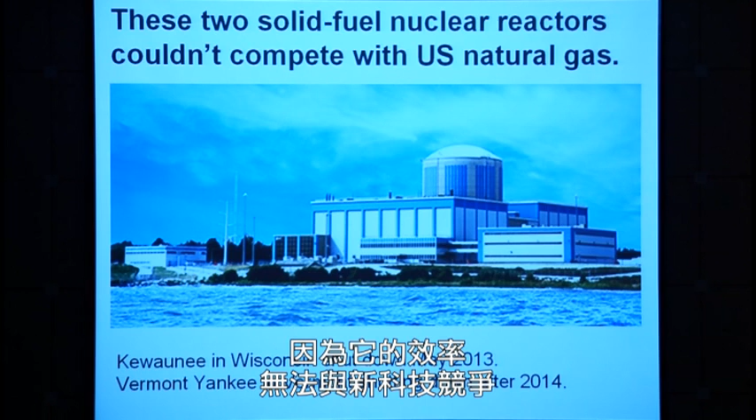The last one near where I live couldn't compete.

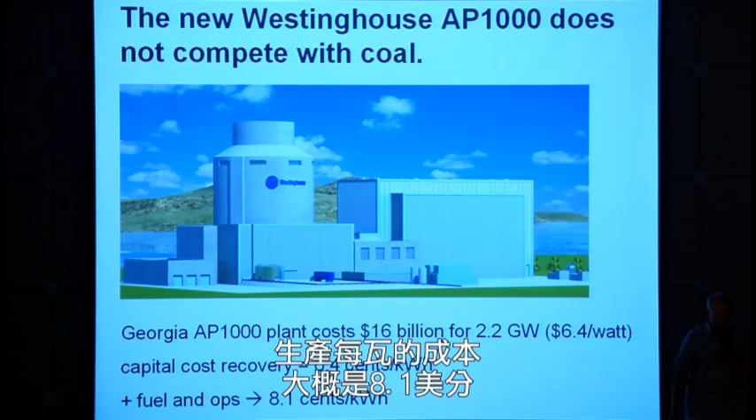There is a new Westinghouse model, an AP1000. Four are being built in the US, four are being built in China right now, and some in other places. If I go through the normal math about how much this is going to cost, I come up with about 8 cents a kilowatt hour for electricity from this new-fangled power plant. That's not going to be quite good enough. It's not cheaper than coal, and it's not cheaper than natural gas. So we can't expect the world to give up coal for these kinds of reactors.

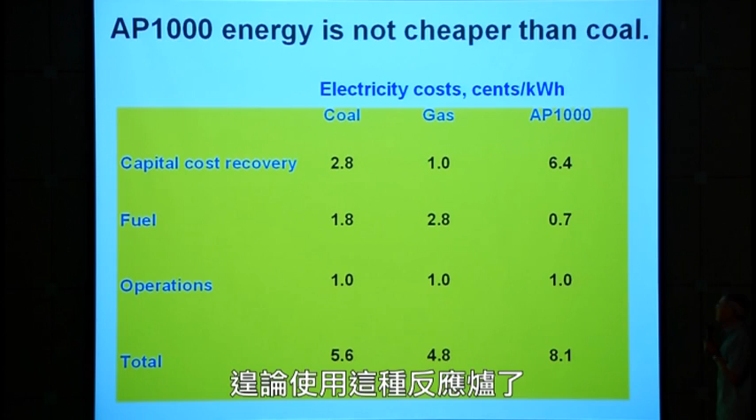So we need a new approach. In the space program, we rejuvenated that program by going to privatization. The company SpaceX looked at the situation with NASA and said that the space shuttle was a complex instrument using 1970s technology that had not been upgraded. So Elon Musk, that entrepreneur, said, okay, let's form a company, let's be innovative. They designed an entirely new rocket engine.

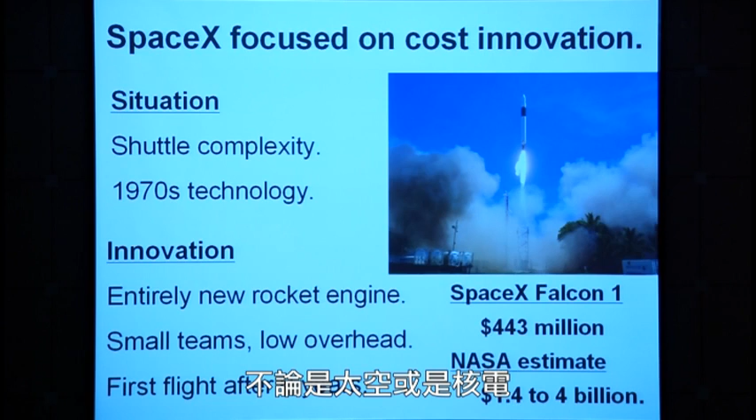They put together small teams with low overheads to fabricate and design new kinds of rockets. Six years after founding the company, they had their first flight. Their first success was this product for $400 million, successful, where NASA had estimated as much as 10 times that cost. So there is an opportunity for cost innovation in space and in nuclear power.

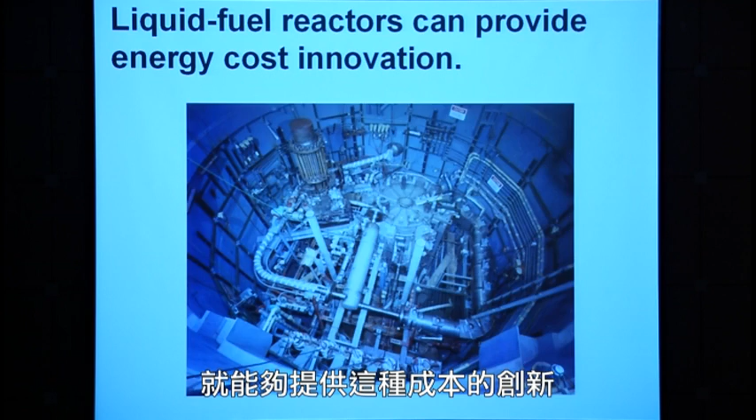And I say that the liquid fuel form of a nuclear power plant can provide that kind of cost innovation, as was done at Oak Ridge.

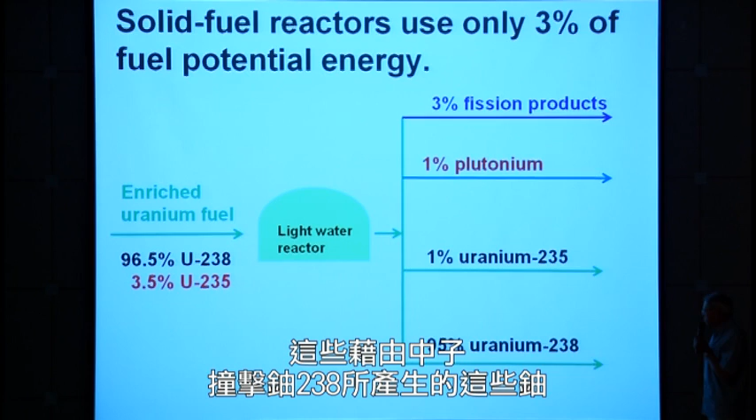has been being burned up inside today's nuclear power plants too. It's a perfectly good fuel, and about 1/3 of the power of the power plant comes from the plutonium that was created by bombarding the uranium-238 with neutrons.

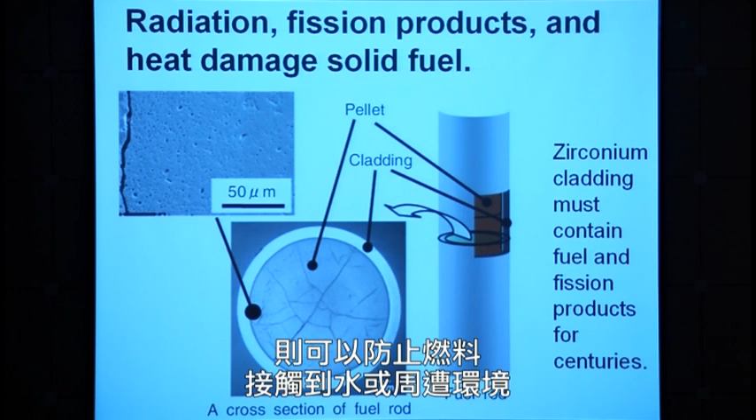But meanwhile, in the solid fuel plant, all that's happening inside this sort of ceramic uranium oxide pellet that is stuffed into a zirconium fuel rod that protects the fuel from the water surrounding the fuel rods. We have to take those fuel rods out before we get well into consumption of the potential energy there, because we're afraid they might crack.

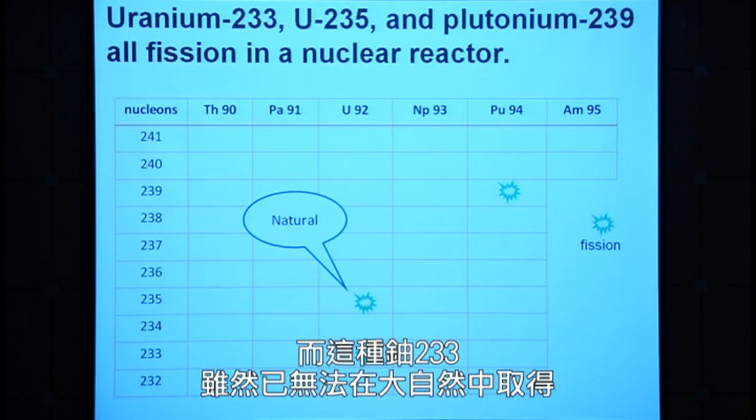There's three kinds of fissionable power sources you can use in a nuclear power plant: the plutonium we spoke of, the uranium-235, and also an isotope that's not naturally available anymore, uranium-233, that we can actually create.

Here's the example of creation of plutonium in a power plant. Neutron absorption, in this example here, where the rows represent the atomic weight of the atom and the columns represent the number of protons in it. That neutron absorption creates a kind of uranium that's not stable and decays in a few days to plutonium, which is a fissile material that's burned in the power generation.

Same thing with thorium. Thorium absorbs a neutron, decays in a few days to uranium-233, which is a useful fissionable power source. So that's the idea of a thorium reactor - it literally creates its uranium on the fly from the thorium.

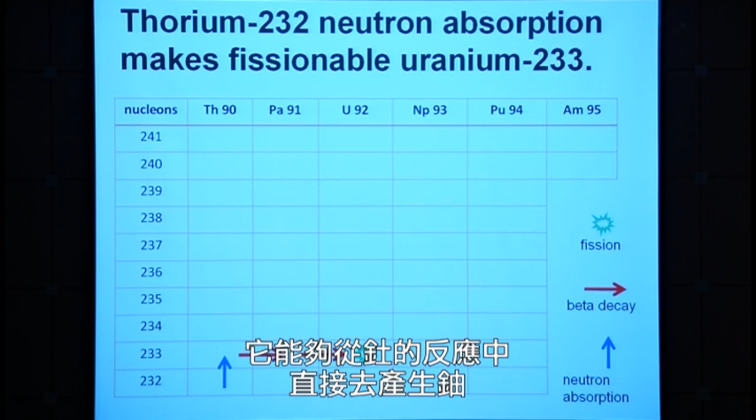Weinberg invented another kind of reactor that used liquid fuels. In this example, it wasn't thorium yet—it was still a uranium reactor. What they did was melt a salt of lithium fluoride and beryllium fluoride, and dissolve in that salt the uranium fluorides to be a carrier for the fuel and also to transfer the heat. That was the first such reactor, back in 1954. It did work.

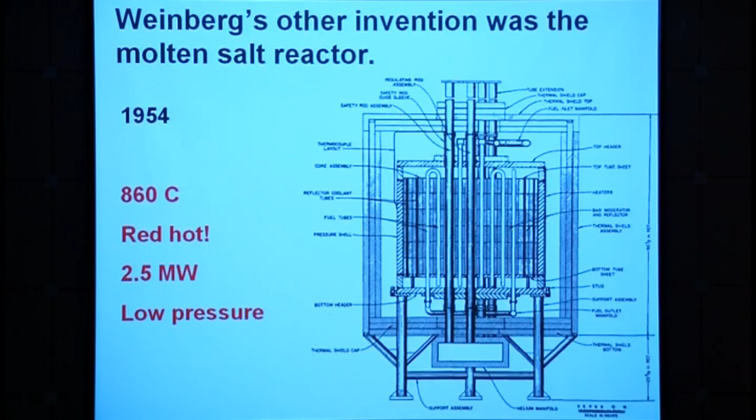Then he had a vision of using it with thorium, but wasn't quite ready yet. They did one more test reactor in the 1960s to do better research on the technology. That was successful as well, at Oak Ridge National Labs in the US.

Now, the way these reactors work: in the orange core we have a normal nuclear power plant fissioning reaction where the U-233 or 235 atoms would fission, and neutrons would then fission others of them. But extra neutrons would go into a blanket around it with thorium, and those thorium atoms, when they absorb neutrons, would decay to U-233. There was a mechanism to chemically separate them out and take that newly created U-233 fuel and put it back in. That was the first concept of the liquid fluoride thorium reactor.

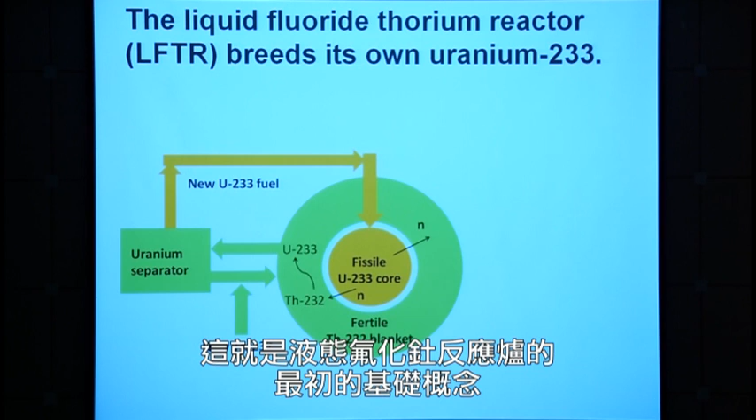Same thing on the way out: we would take that hot fuel through a heat exchanger and eventually run a turbine generator, and also separate the waste products—in the sense of fission products, the barium, the krypton, the xenon, the cesium, and so on—and take them out. That was his vision. He felt that humankind's whole future depended upon this really inexhaustible energy source. So he was consumed with trying to get this product completed. He never succeeded.

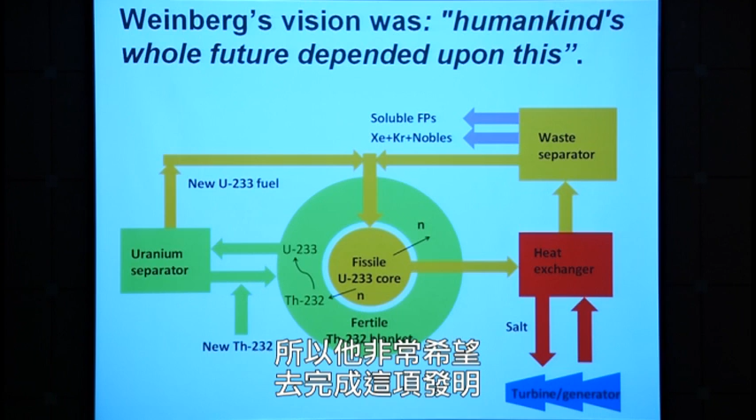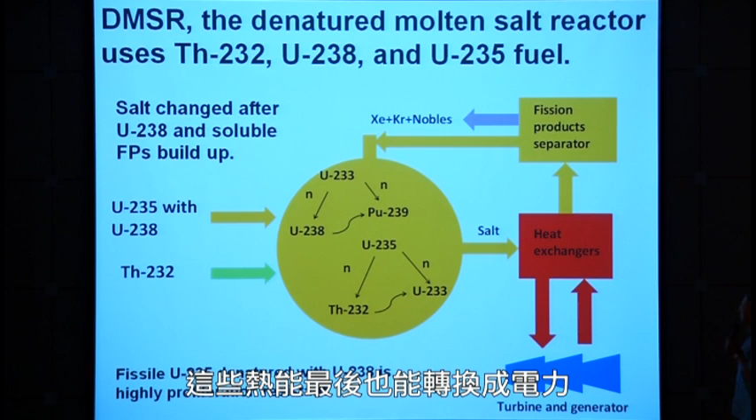There's another variation that's more likely to happen in the very short term, and that's a single fluid reactor, much simpler, called the denatured molten salt reactor, that many of us are working on. In this kind of reactor, the uranium that comes in is mixed U-235 and 238, like in a typical light water reactor, but in a form that dissolves in the salt. Another input is thorium in the same way. So there's only actually one big vat of liquid that generates heat that is eventually converted to electricity.

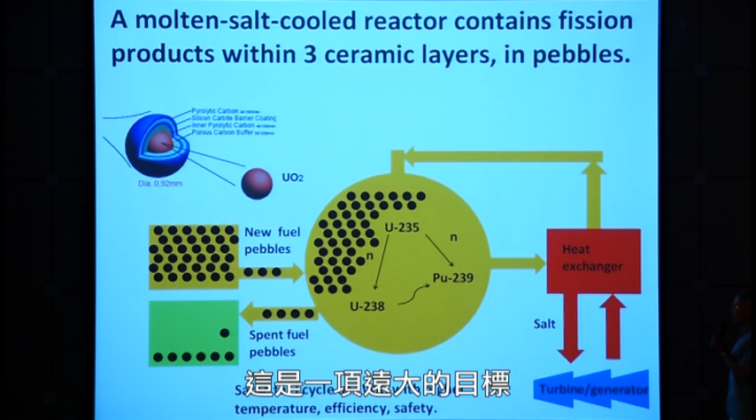What China is doing in its first molten salt reactor is the same thing that MIT and UC Berkeley have done research in, but not executed yet—a so-called pebble bed reactor that's cooled with molten salt. Instead of dissolving the fuel in the salt, the fuel is kept in pebbles about the size of billiard balls, and inside them are thousands of grains of sand, where that sand is really uranium oxide, covered with 3 ceramic layers to contain all the fission products within those billiard balls. This is a near-term objective in China, which hopes to have this up and running in 2017.

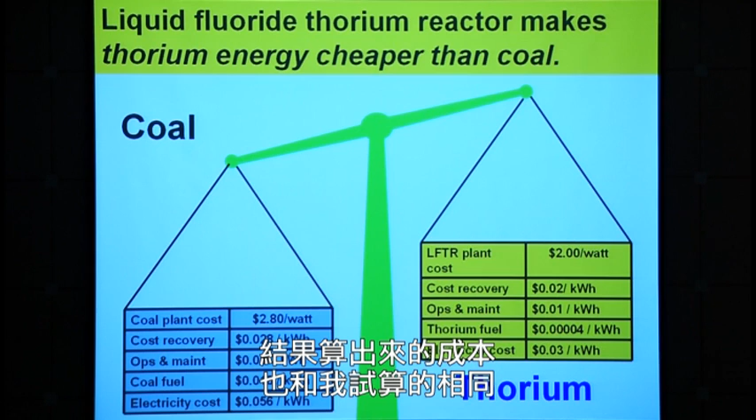When I do the costing, I find that I believe we can do this electricity from a thorium-based liquid fluoride reactor at about 3 cents a kilowatt hour, and I have one person who has done a rather complete design over the last few years who has costed it and comes up with the same number. Why is it cheaper?

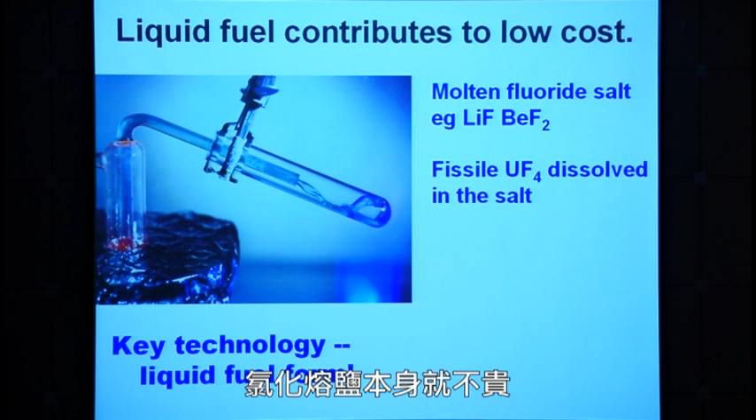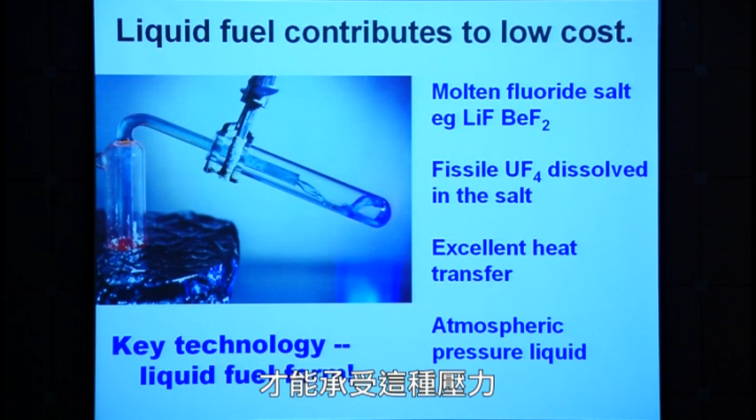Well, number one, the molten fluoride salt is not very expensive, so the fuel containment mechanism isn't very expensive. The heat transfer works really well, partly because we can run that reactor at a very high temperature and get the energy out of it quickly. The other nice thing is it runs at atmospheric pressure, so there doesn't need to be a lot of reinforcement. A normal light water reactor, like at Fukushima, had over 100 atmospheres of pressure, which required that the big vessels be strong to contain the pressures.

Now the safety is more intrinsic and dependent upon just the physics in this sort of reactor. The reactivity is stable - if the reactor gets too hot, the fission rate goes down. If the reactor gets too cold, the fission rate goes up. It's just natural from the physics, and doesn't require any control rods or mechanical things to happen.

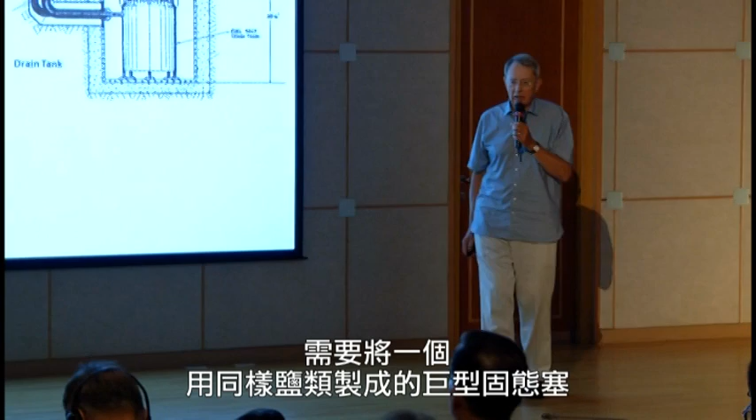The other thing in this reactor: at the top of the picture, in the top vat, is where the reaction takes place, and at the bottom is a so-called drain tank or dump tank. Keeping that hot liquid in the operating reactor is done by having a plug of that kind of salt in solid form in a tube near the bottom of the vat, so that if the reactor were to overheat, all that salt would melt the plug and it would drain naturally into the drain tank, without any physical controls or operator actions. It's another example of intrinsic safety rather than engineered safety systems.

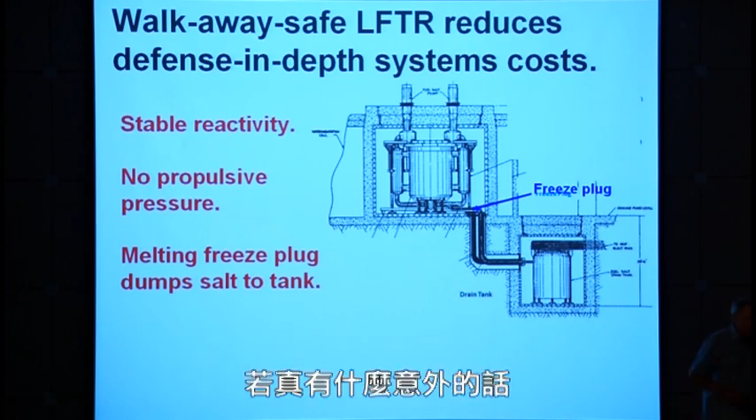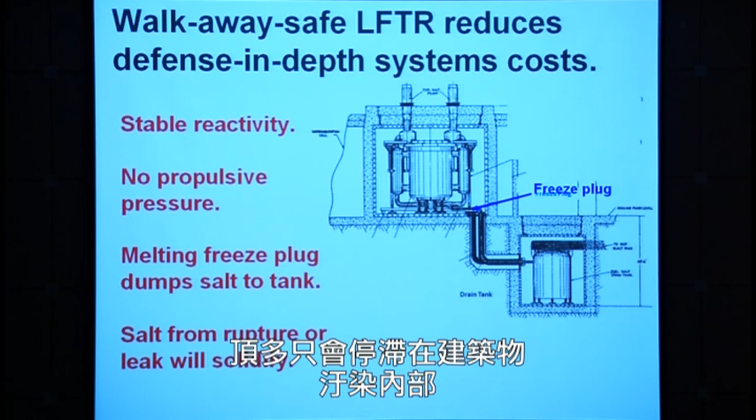Because it's at atmospheric pressure, if there were some sort of an accident, there wouldn't be a force to propel radioactive materials into the environment. And if there were just a rupture, the salt would be a mess, but it would leak out onto the floor, contaminating the building, but it would lie there and slowly solidify.

Another example is the fact that this is a very small reactor. It was designed to have low mass. The original motivation for the design was one small enough to be an airplane engine.

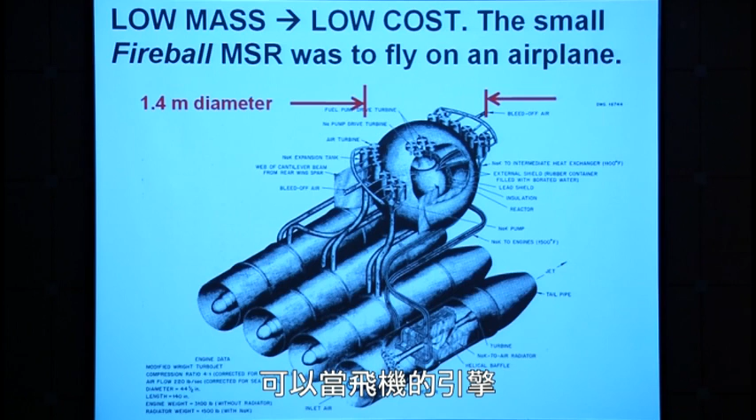Compare that to what's going on at the AP1000 in China. Just the roof of the containment building is a big lift, 780 tons.

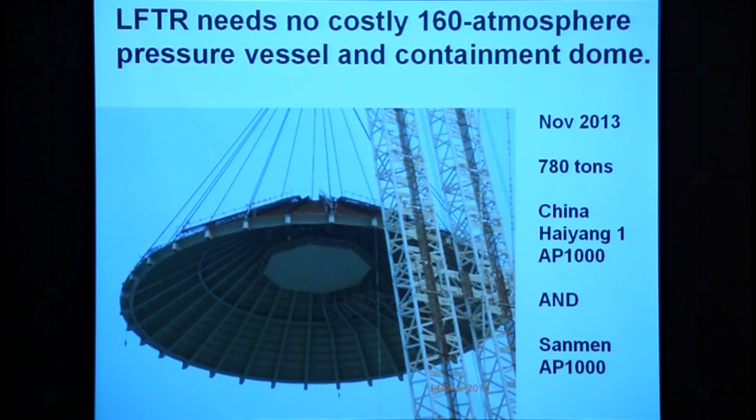Some advantages of the liquid fluoride thorium reactor are the high temperature. The higher the temperature of the reactor, the more efficiently you can extract the energy from the heat. This example is a technology that South Africa has tried, but hasn't really worked on a commercial scale yet - a so-called closed cycle Brayton cycle with helium to convert the heat into mechanical energy to run the generator. Again, the high temperature helps.

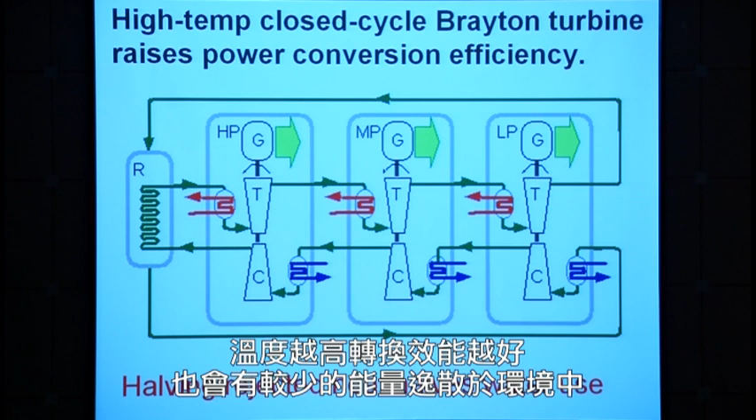The higher the temperature, the more efficient the conversion, the less waste heat we have to reject into the environment, the less water cooling, and the less water consumption by that kind of reactor. There's also an open air version of this that works reasonably well. There's some new technologies coming down the stream.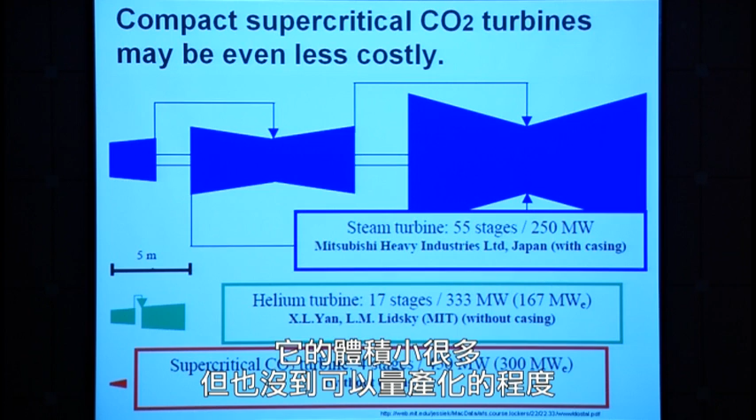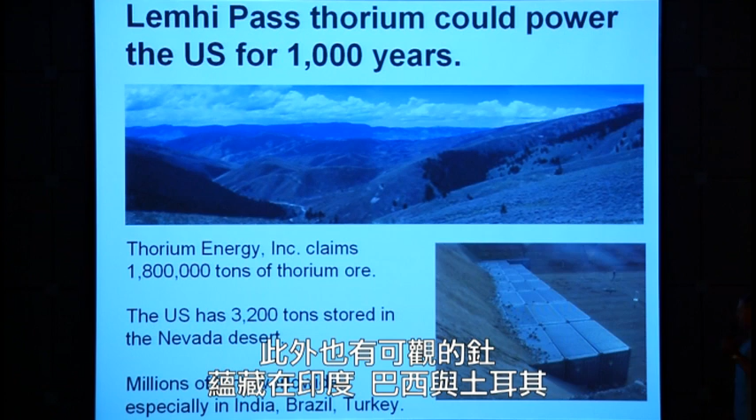There's lots of thorium. One spot in the US has that much thorium - there's plenty. We only need about a ton a year per reactor. There's particularly a lot of thorium in the beach sands in India, Brazil, Turkey. There's actually about 5,000 tons in Taiwan on the beaches on the southwest shore. And it takes about a ton to run a city for a year.

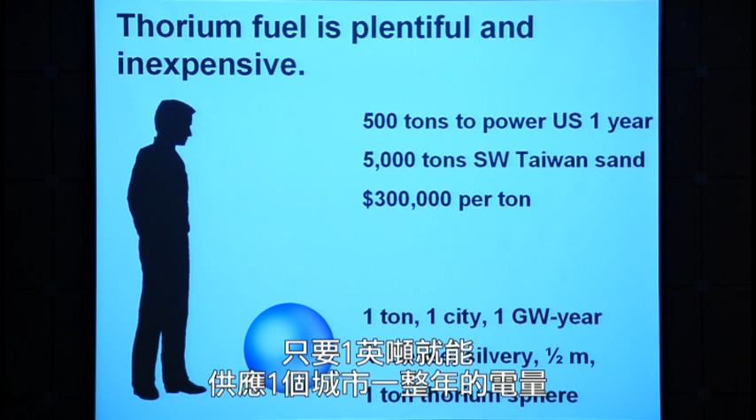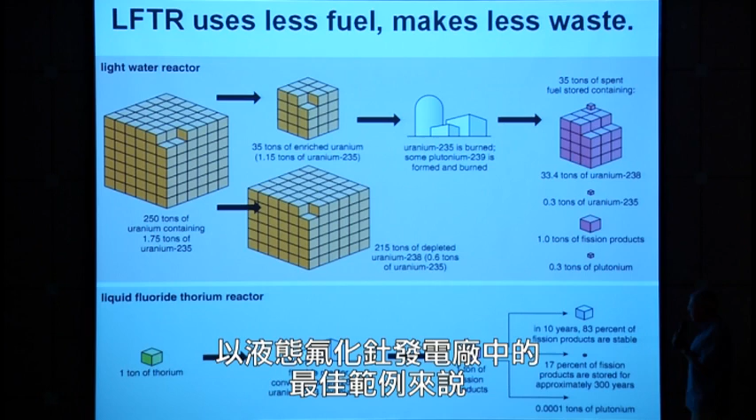Again, compared to the light water reactor, we don't need as much - we don't need to mine as much of the metal to start with. And the other thing is that in the best example of the LFTR with two fluids, we can have a very, very small amount of waste radioactive material at the end.

In fact, after 300 or 400 years, the radioactivity of the waste products of these kind of reactors is actually less than the radioactivity of the natural uranium ore that was mined in order to create that fuel.

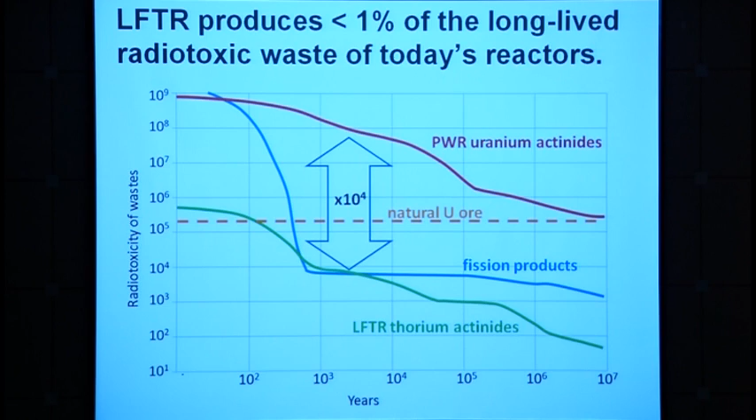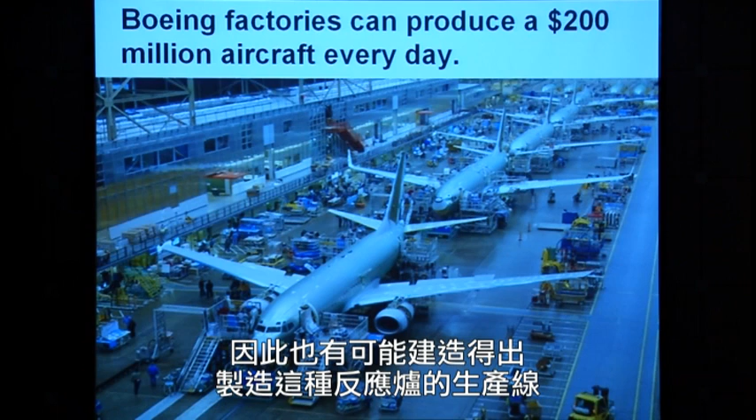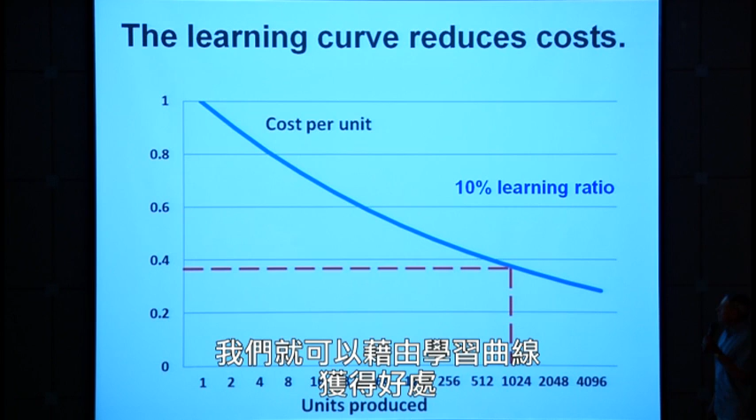And the more we do that, the lower the costs can drop. This is the classic learning curve for manufacturing - once we get into repetitive manufacturing, we can begin to get the benefits of the learning curve and drop costs. This is a way to get energy cheaper than coal.

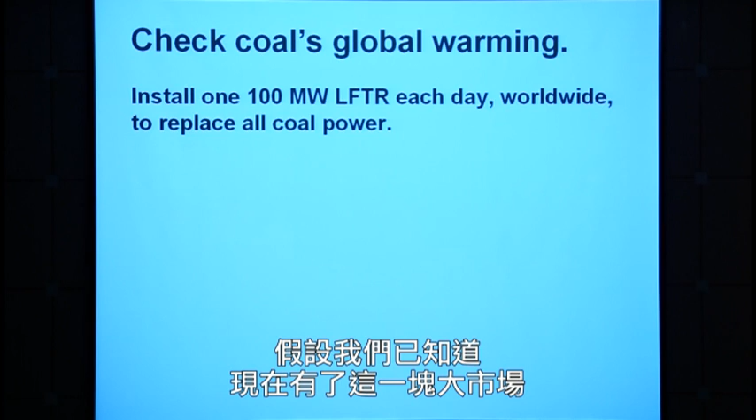Suppose we actually did say, okay, now...